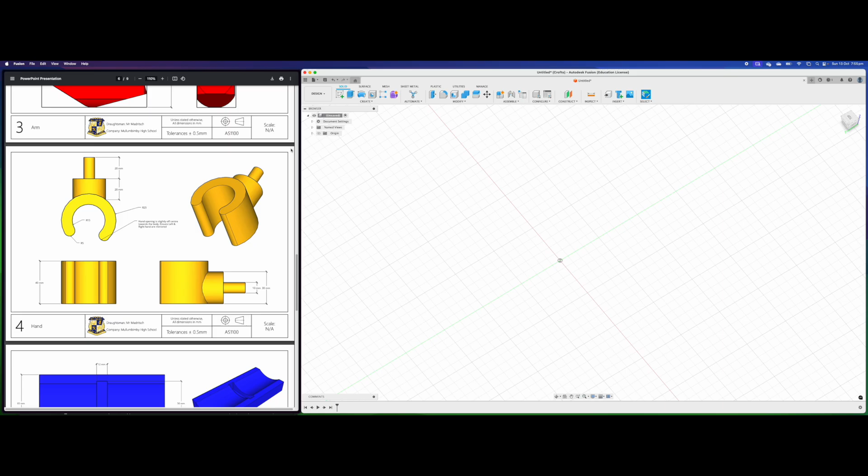So let's get started. Sketch, top down. I'm going to grab my circle tool and come out at a diameter of 50. Where does 50 come from? Well, this is a radius of 25, but when I draw in Fusion, it uses a diameter, so it's 25 times 2 is 50. And then for my next one, it's a radius of 15, so it's a diameter of 30.

Now I just need to go and put these curvy bits in. So I'm going to put them in around here, and then I'm going to cut out the middle part. To do that, I'm going to go to the arc tool, 3-point arc. I'm just going to click once and click twice. There's one arc. I'm going to try and make it somewhat even for the other one.

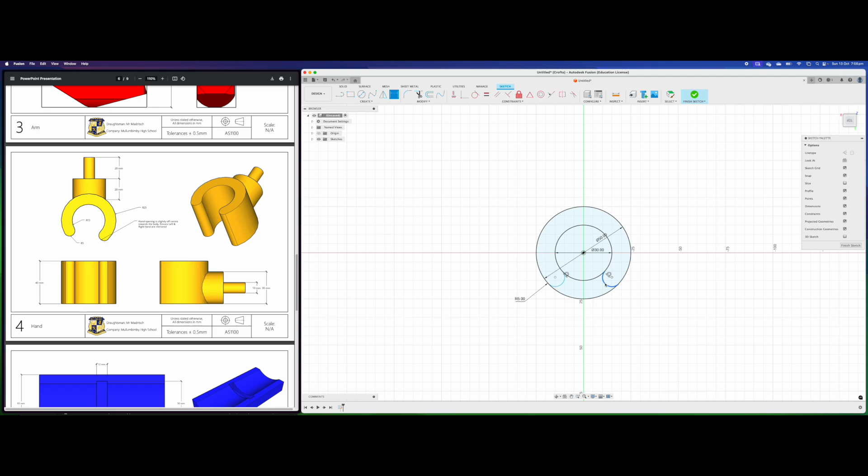Something like that. Now it does say over here, slightly off center towards the body, left and right handed mirrored. I don't really mind. If you just draw yours about centered and it looks about right, that will do us for now. So that one is a radius of 5, that one is a radius of 5, and that looks pretty good there.

So what I'm going to do then is just finish my sketch. Extrude up, but only extrude that bit. And the height on that is 40 millimeters. So there's the first part of my hand.

For my second part, what I need to do is I need to draw on this face and then pull it out, but I can't draw on that face because it's curved and not flat. So to be able to draw, I need a flat surface. Normally we just hit sketch and we click our surface, but because it's not flat, I can't select it.

So I'm actually going to put in another plane. So what is a plane? When I click sketch, these orange things that we start with, our X, Y, and Z planes are the planes. So I can actually put one wherever I want.

So I'm going to choose an offset plane, which just means a plane a certain distance from somewhere. So I've just clicked, let me do that again. Offset, I'm going to go offsetting this plane here. I'm going to drag him back.

Now if I go to my top view here, you can see if I bring him out 25, it's 25 to this outer edge. But I want him to sit inside my hand in here, so that when I draw it, it sits in here, then I extrude from there out. So this section out here touches out here. Otherwise we'll have a gap if we put him out here. We'll have a big gap in here. So just bear with me.

So there is my plane sitting there. So now when I go sketch, I can choose that plane and draw on that plane there. I'm just going to grab a circle. I'm going to draw it at a radius of 30. Where does 30 come from? This distance here is 30. And that's our diameter, sorry, I said radius - that's our diameter. Diameter of 30 for our circle.

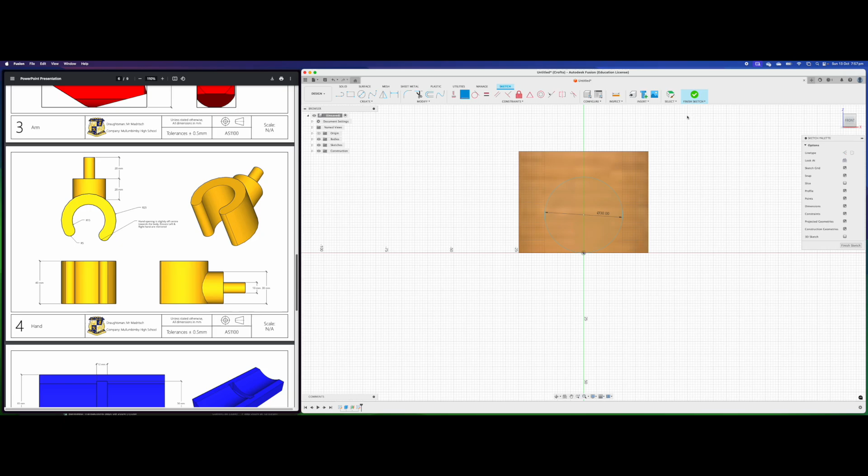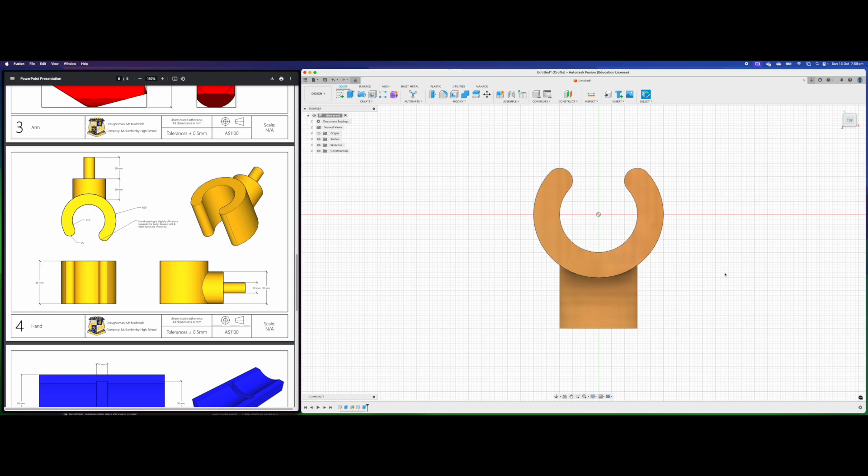Once that's done, we're going to extrude that circle, pull him out. How far out though? Well, if I come like this and I come 3, 4, 5 to the edge, plus another 20, so I need to go minus 25. And instead of cutting it, I want to actually change it to join, so it adds on more stuff. So there's my first part.

And for my second part, sketch off here, one circle. If I find that circle like that, that's the middle of my other circle. Diameter of 10 from my drawing. Then we're going to extrude him. How far? It's 20 millimeters. And there is my hand done.

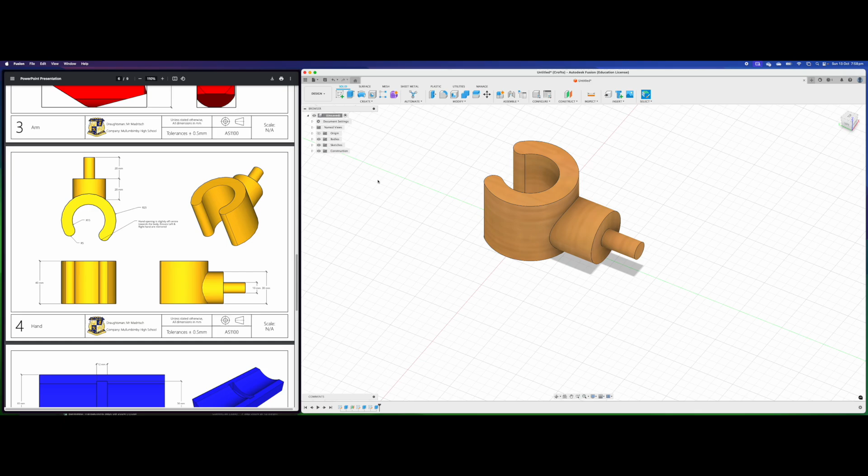The only other thing I need to do is change the appearance. So I can right click and go appearance. And I've gone into paint in here, paint, glossy. I'm just going to grab that yellow one, drop him in, and there is our hand done.

Don't forget to save him, Lego Man hand, all sorted.